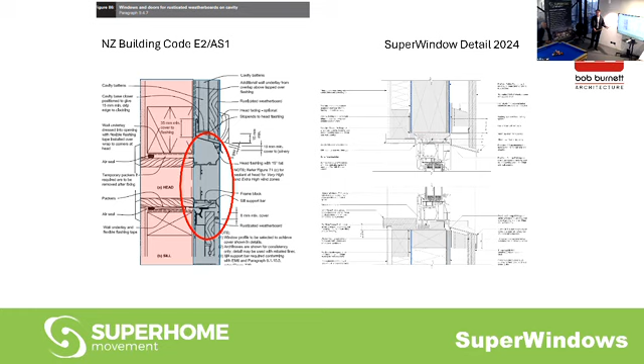And we've got a massive thermal bridge here, a super highway for the cold to go through. So that's just completely bonkers. And that's not the way the rest of the world does it - New Zealand is an anomaly. So what we've decided is that's much better, having the window sitting on the frame. This is a triple glazed PVC window in this detail, and the key thing is we can do away with that support bar, and we can just recess the windows.

Super stupid. So we really need to do much better. I think when that detail was created, the building code detail, that was probably not a good detail at the time, back in 2004 or whenever the building code introduced that. That's a long time ago, and it still hasn't changed.

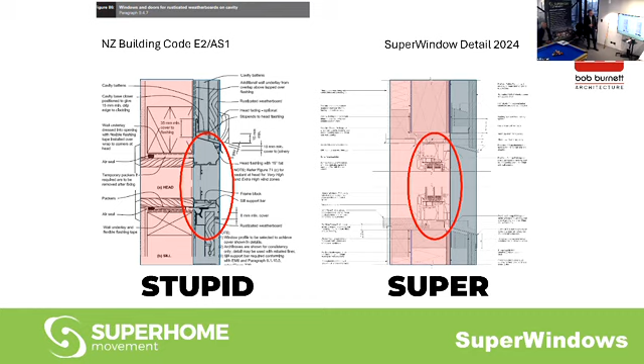I can remember going to a workshop in Auckland with about a dozen people from all different fields - BRANZ, MBIE, industry folks, designers, architects - and everybody put their details up on the wall and rated them out of 10. This building code detail rated very highly for weather tightness. It rated 0 for thermal efficiency. So basically they threw the baby out with the bathwater with the leaky building syndrome and forgot about thermal efficiency.

There's a lot of words here. I think these, on the top left, are the 10 things we were considering, and nobody had mentioned aesthetics. So I chipped in and said, well, we need to think about what it looks like, as well as the buildability, the weather tightness, the air tightness, the durability/longevity, performance. Performance can mean many things - it could be acoustic performance, thermal, energy efficiency, cost, comfort, compliance. There may be others, not necessarily in that order, but that was the things we were considering when talking about a detail for windows.

And I know, to be fair, BRANZ - MBIE are working on this, and they're close to doing something. I think Martin was saying the other day. So that's really good news. And it's really good that H1's changed, but we just need to start thinking about the building as a system and how everything works together, rather than thinking about certain details in isolation. Because that doesn't work - we need to think about everything together.

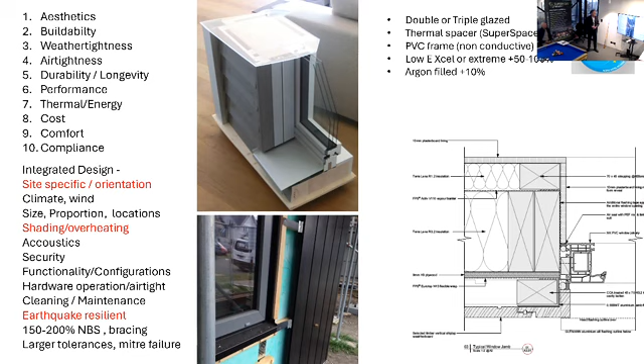So the rest of this slide is really just to jog my memory, and others will talk about double versus triple glazing, thermal spacer, SuperSpacer - good name - PVC, non-conductive frames. You know, timber's non-conductive too, it's just about twice the price of PVC. That's the only problem. Low E is probably your biggest improvement, because bang for buck, low E can improve the windows the most. Argon a little bit.

So 0.5 is what is required by code now, but you can get windows up to 2 R value. So often people talk about U value, which is just the inverse. So 2 would be 0.5. And the smaller the number, the better. So 0.5 would be 2.

I've already talked about recessing the windows, and there's a lot of things missing from the building code, and that's really what's driven the super home movement to be a voice for change. The building code - we talk about that being the worst possible house that you're legally allowed to build. We know, well hopefully most of us, because most of the people on this call seem to be industry people, hopefully most of us know that we need to be doing better.

The challenge is probably everybody's on a budget, but the challenge too can be pushback. I had someone contact me a week or two ago through Super Home Movement, just saying that they're having trouble with their builder and their designer, saying, do we really need to do more insulation? Do we really need to do better recessed windows? Why can't we just do it the same way we've always done it? So even if builders know, if they haven't got experience with doing things differently, they try and deflect that.

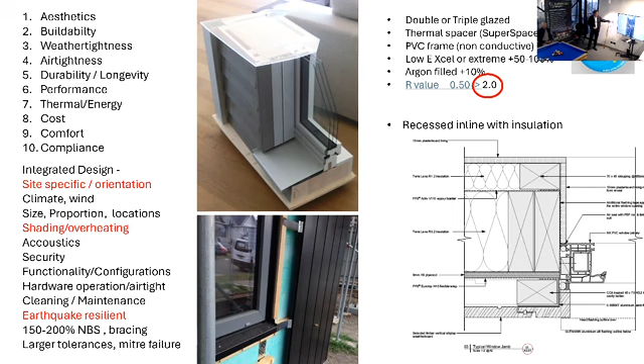So yeah, lots of things to think about, and like I said, this is really just to remind me.

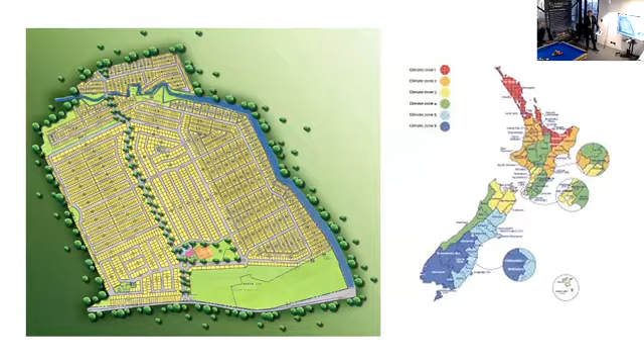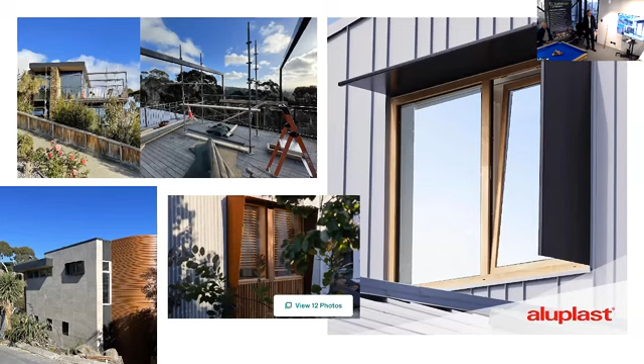But sometimes that's not enough - sometimes you might need some horizontal shading as well. So some of these options are good, with a little eyebrow shroud for the window.

The top left is actually my own house, which we, when we did the earthquake repairs, did a lot of improvements to the thermal performance. We always knew the top level had overheating potential, so it got triple glazing. Because of the height limit on the hill, we weren't able to have a large overhang. It did previously have a sunshade around the windows, but it wasn't enough.

So what we've done is put these RHS frames, and we're planning to install 6 solar panels there, which is going to provide some really great shading to that space. So you can do things like that. We've also done bottom left, put some surrounds and extra overhangs. That's the east side, so it's not as important as the west side.

This house here, we were particularly concerned with designing it so it didn't overheat. There are massive overhangs, various shading devices, and it's a 2-story house, but it has shading, a little eyebrow for the lower level as well, which is often something that's missing with a 2-story house. It's more difficult to get the shading to both levels.

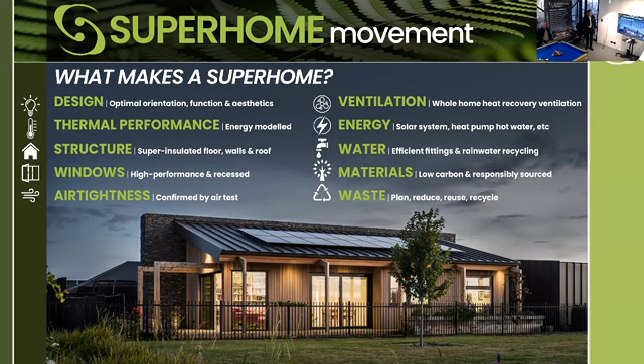Yeah, most of the glazing is facing west in that open plan area, living dining kitchen area with a high roof. So that's why we were concerned and looking at ways that we could deal with any potential overheating.

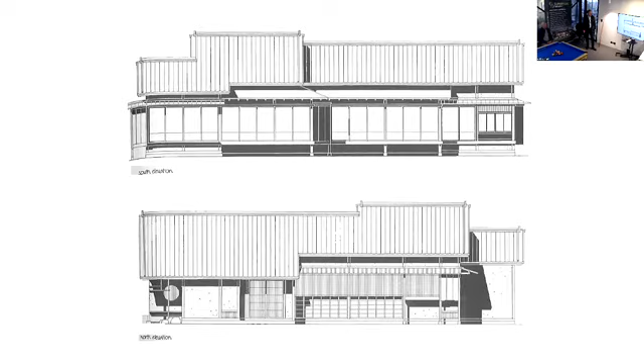Very little glass. So the Japanese, traditionally, their method of construction is post and beam. So basically, there's no walls, and in the very old homes, there was a lot of wooden shutters and shoji screens and fusuma screens. So basically, you can just shift the walls around with shutters. And then later, if you look on the top left, glazing was introduced, but it's still got this really interesting

feel of openness. And kyokai, that's a word that sort of means the way in which space is articulated, kind of like the blurring of boundaries, and how you can have this flow and transition from the inside to the outside. And that's something that we see in a lot of Kiwi homes because we've got such a wonderful outdoors and often we've got a beautiful view.

So it's a little bit at loggerheads with the idea of thermal performance and protecting ourselves from the elements. In its most basic, a window is just keeping the weather out and keeping the outside out. But if we were going to take that to its absolute extreme, we'd have very small windows or we'd have no windows. But that wouldn't be a pleasant building.

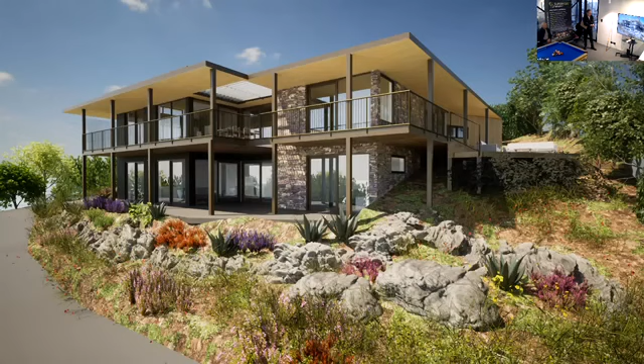But this is, again, this idea of almost an outdoor room because it's got an absolutely fantastic view. But there's the ability to close this house down or open it up. This is a design that's under construction at the moment. So there's again these massive overhanging roofs and a veranda in this case.

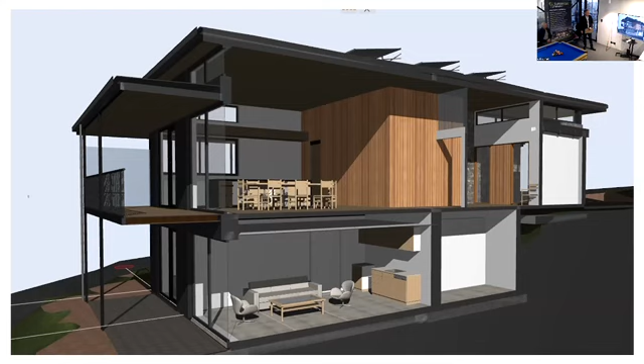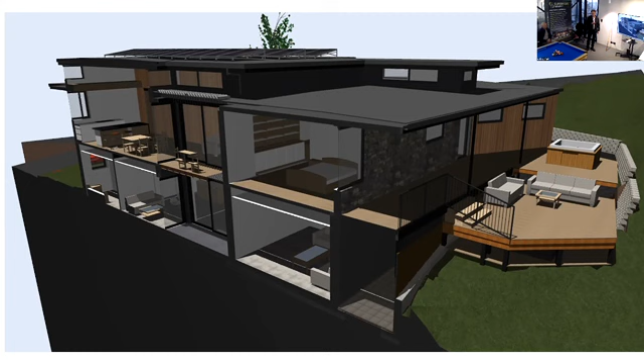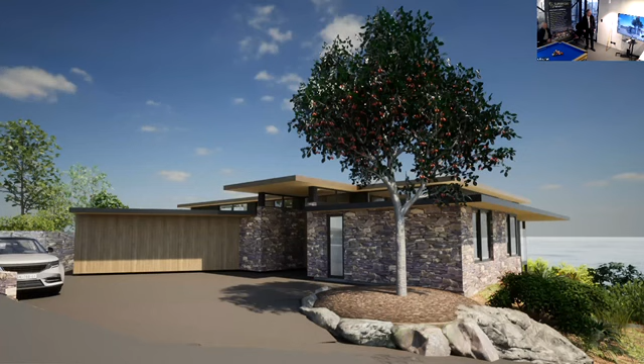And it's just really enjoyable. Sometimes we do a house and people comment that they're delighted by the light, but that's something that they probably weren't thinking about and weren't expecting. And in this house, the entry hall is like a place where they can hang their art, and there's a really nice quality of light in there because you're getting south light into that space. So that's just the other side of that house.

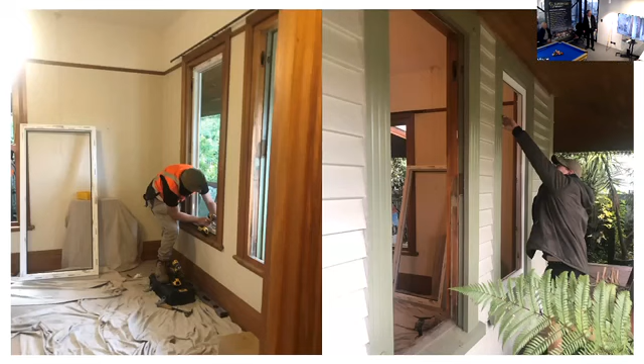Now this house here is a house that I lived in for 7 years while I was waiting for my earthquake repairs to be done. And Martin from NK Windows replaced some of the windows in this house with some pretty good windows with Low-E extreme glass, I think, and made a huge difference. It was really easy to do. It actually looked quite in keeping.

So we put this transom through the middle, so it looked not unlike the double hung sash, sliding sash windows of 1906 when this villa was built. So it was really cool. And then we actually managed to keep some of the leadlights. That's still got the original windows, but we kept some of the leadlights when we replaced those windows. Really quick, it took I think a day and a half to replace about 10 windows. We did 3 bedrooms.

I think a really important thing is retrofitting houses and doing it properly, and windows is a big thing. So if you look at this house, in some ways we've sort of gone backwards because the windows were originally recessed back in the day. And so we've kind of gone backwards now with our flush windows, with the way the building code tells us to do it. So that house is going to be removed in a couple of 3 months, and someone's going to finish off the renovation of that house on another site in North Canterbury.

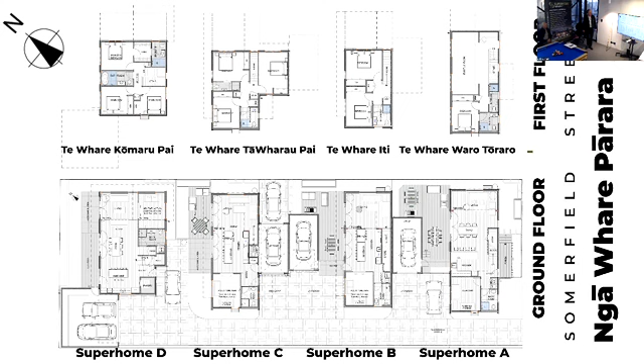And then we're going to build 4 townhouses, and these townhouses have been designed for light and sun. So they're kind of semi-detached. Of these 4 homes, the front one and the back one are standalone. The middle 2 are really only attached by the garages, and then there's space, you can see it in this image here, so you can get light all day into the homes.

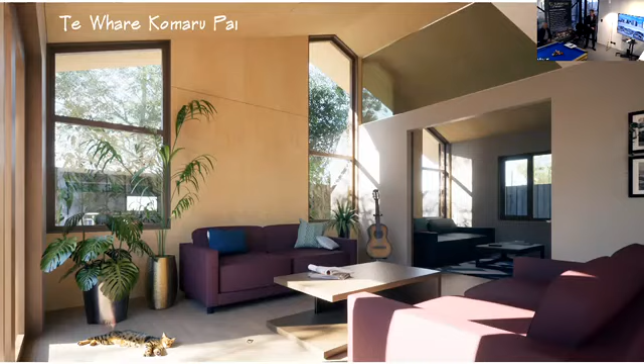If this was a typical developer, they'd have filled in the gaps between each house, and there would be 7 units there instead of 4. So we're just thinking about the best possible living environment for people and making places that are delightful to live in: people before profit, health before wealth. So inside these homes, they're all actually semi 2-story. There is a large open plan living space with an over height roof, the opportunity to get some nice glazing and some nice light into the living spaces.

So just quickly look at what I've forgotten to talk about, which is probably a lot, but it's about time to hand over. The other things I had on my list, maybe we go back to the room and I can introduce the next speaker shortly, but the other thing I had was just the importance of integrated design. Some things I haven't talked about are acoustics and security.

Acoustics is really inherently dealt with by having better thermal performance. The triple glazed uPVC windows are great for acoustics. The functionality, perhaps you guys can talk about the tilt and turn. The great thing about tilt and turn is, if you design them well, you can open the window and clean it from the inside, but also ventilation. And they're very airtight because of those mechanisms.

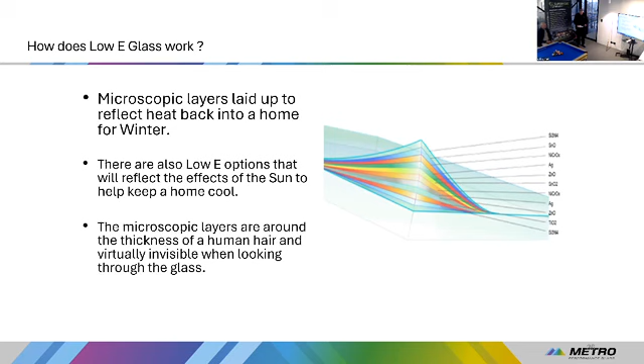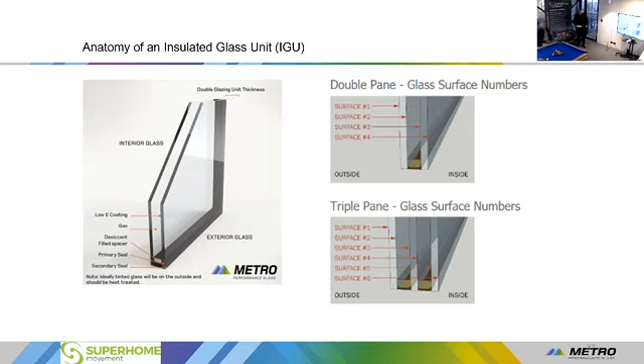The other important part is the thermal spacers, in that they don't actually affect our U rating, so when you see our data in our information. But where they do come into their own, we quite often get requests from people doing calculation or modelling, because it's important that they know what the psi value is of our thermal spacer, because it does affect the R rating.

So another important aspect is we're only one component of the overall window, and that's where Martin and Andrew will come in later with that aspect of it. But obviously we are an important contributor, in that our glass does need to meet certain requirements, insulative and otherwise. And so that's where we work as a team as we develop a window system.

The other thing is argon gas. There's a few things that are out there in terms of how long it lasts. Basically in our factory we try and target 95% filling. We need to get equal or above 90%.

The point that I do make is that when people talk about low-E coatings, they say, oh, you've got the XL, so it's going to automatically meet U 1.1, say for zones 5 and 6. Well, no, if you have low-E XL but you have a 12mm spacer, it won't meet U 1.1. So you've got to take into consideration the thickness of the spacer when you're calculating the U values. And again, that's something where we're readily available to help.

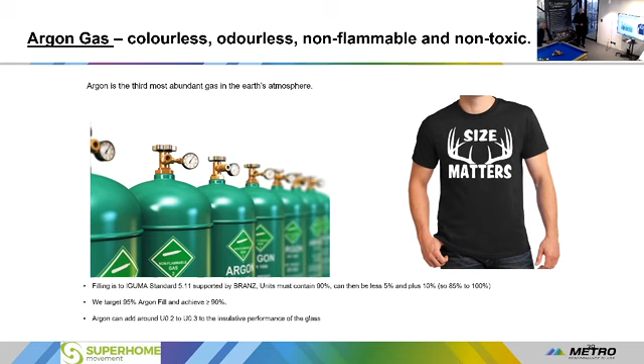As Bob said earlier, as houses get more thermally efficient, they get better at keeping the heat in. So an important aspect, and that's why they've been developing these low E coatings, is to have more solar control available. It's not the silver bullet solution, but it helps. What's also required are the other physical aspects Bob talked about, like the eyebrows, or landscaping, that sort of thing. But it certainly can provide very good protection.

And with solar control, there is no sweet spot, is the other thing we've found. So you can't say lowest is better, because it isn't. Sometimes people are looking for a combination of both insulative performance and passive heat gain as a compensation, or else they want to lower the amount of overheating. So again, it's our job to listen carefully and then provide solutions.

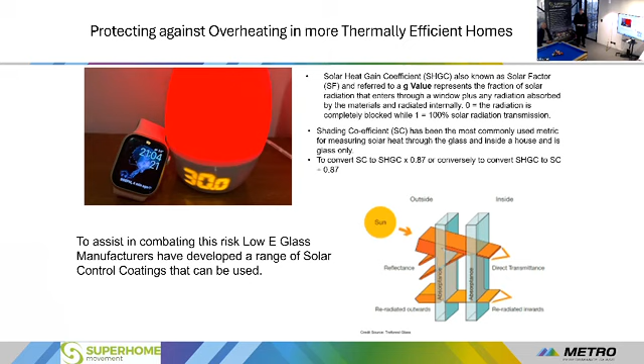We enjoy doing that. And certainly in this area, we openly invite people when they've got a project to come and talk to us, and we will actually provide specific reports to help you target what you're trying to achieve and help the designer get to where they need to be, rather than taking that generic approach.

The other thing we've found is we're trying to keep things as simple as possible at the initial approach, because we don't want to frighten people off from making good decisions. Sometimes it feels like people make things overly complicated. So last week we totally revamped our website, and we hope people find it far clearer. We try to listen to what people say, and that was a big undertaking, but we've tried to make it easier for people to start, ask a few basic questions, get the direction going. If the person building wants more information, they can refer their designer to contact us and we'll help get them to where they need to be. We think that's a good value add we provide.

Now, what is thermal breakage? Basically, if you've got one pane of glass and it's got heat on one part of that same pane, say direct sunlight, but part of the same pane is also shaded, the bit that's getting warm expands, whereas the other bit that's still cold in the shade remains and doesn't expand as much. What can happen is part of the glass is moving, part of it's standing still, and it'll break. That's particularly high risk when you've got thick, believe it or not, annealed glass.

So what's annealed glass? It's the glass that comes off the float lines before it's had any processing and then gets toughened. Once we toughen a piece of glass, you can't polish it, you can't drill holes into it, it just automatically breaks. But before that stage, when it's annealed, you can do a whole lot of things with it, which is why it's like that.

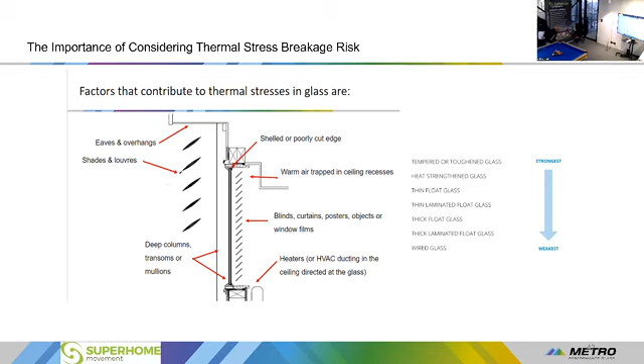So my name is Andrew Kruger from SuperWindows. We manufacture windows in Europe and import them here. They're not standard sizes, they're made to order, so it's atypical for New Zealand houses. We've been doing it for the last 7 years, and over this time we found that what Bob and Darren were talking about, the shading effect, should be on the outside. There's protection; once the heat is in, it's too late.

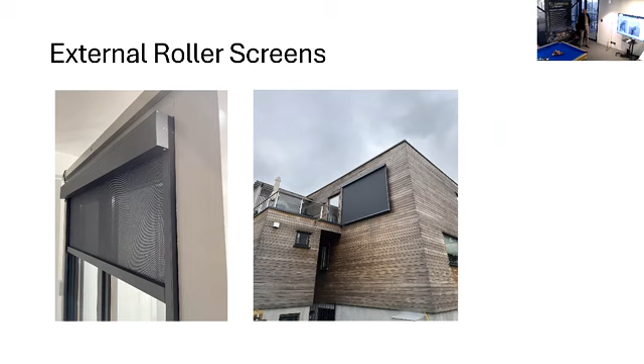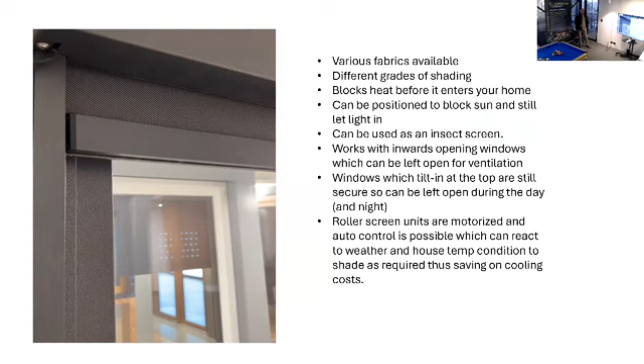So we have this option now available: roller screens. They can operate, you can operate them remotely, you can automate them so they actually screen your window during the day and when you're not there, and open it up. They have different fabrics to choose from, so you can design how much heat and how much light needs to go through. They can act as an insect screen as well. They can be retrofitted, but the window or the wall has to be designed so it's actually close to the windows. They work really well with European style windows, which often do, and we'll talk about it as well.

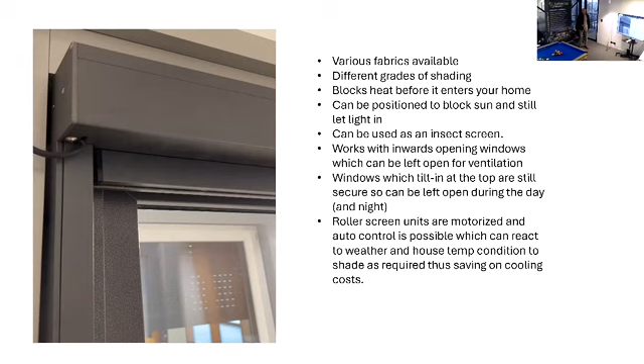You can still ventilate the house, tilt the window in, and shade it. All European windows are generally designed to be recessed. That was done a long time ago. It's typically, like Bob said, all the windows used to be recessed. It's only a recent New Zealand innovation to put windows outside the wall.

They are designed to insulate across the frame. So all those little pockets of air within the UPVC window are designed so more pockets mean better insulation. UPVC itself as a material is better insulated than aluminium. The higher rating you need to achieve for your window, the more pockets, the better, so the window frames are thicker.

The other thing is they need to be that deep to take thicker panes of glass. Triple glazing with 18mm spacing, that's 48mm. Not every frame can take it, but with this triple glazing, you achieve an R value of 1.35. That's on the standard frame.

If you push that window outside the thermal envelope, you create bridging. There's metal bracing inside the frame, so you bypass probably 60% of the insulation of that frame, and you get thermal bridging.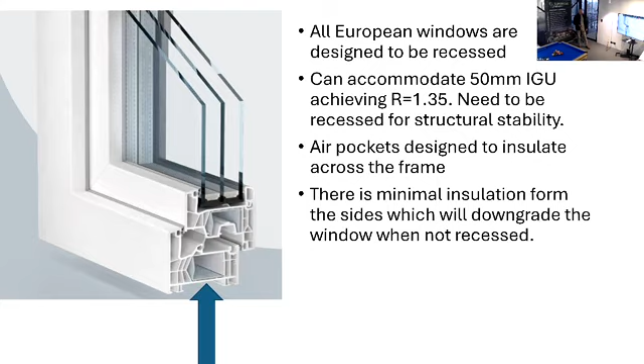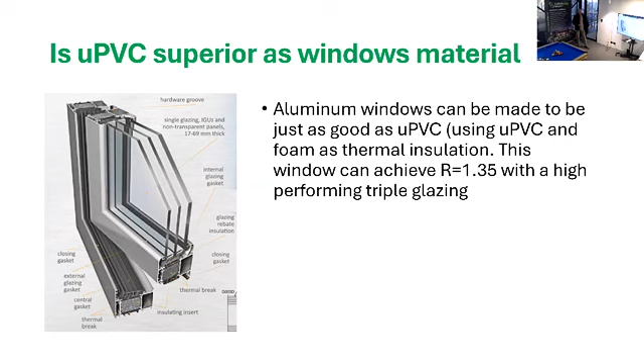You can do the same - that same applies to aluminium windows. Doesn't matter what style of aluminium window it is, or the thermal break. This is one of our standard thermal breaks. You achieve the same value as UPVC frames, but if you push it out, you bypass that insulation layer altogether. So you have aluminium, which is a great conductor, one of the best conducting materials, and you conduct the heat or cold straight through, and you get condensation on the frame.

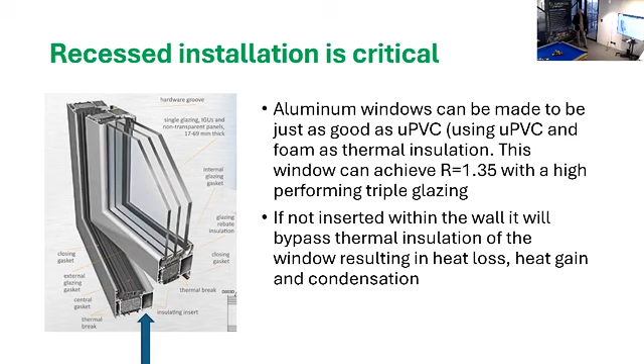The other thing is those frames, because they are essentially UPVC frames with two bits of aluminium on both sides, still have to be recessed for structural integrity to take the weight of the glass and reduce the possibility of bending. With the new sizes of windows being bigger, larger pieces of glass, there's actually a lot of weight on those frames. So recessing them, supporting them all the way around, provides that structural integrity of the framing.

Our advice in general - education is the key. So that's what we're doing today, and it's always free. You'll find all the companies quite happy to talk about what they offer, and the SuperHome movement - there's a lot of information online. There's no reason to say, oh, I'm just buying something, and not have a look at the specification.

When you're just buying the windows or house, whatever you're designing, don't just say, oh, we want triple glaze windows or double glaze. Have a look at what it is, what size it is, where the frames are supplied, will it be able to support it, how it is installed. Maybe your R value for the windows actually won't be achieved when you install them outside the thermal envelope. So all those little details do matter.

With this SuperHome setup, all the suppliers, designers and builders all think the same way. So if you have all three parties and yourself as a homeowner or developer talking about the same thing, you achieve easily what you want within the budget. There's always a budget to consider, so have a look around and get different quotes, because quite often you find that windows that perform better don't necessarily have to be more expensive.

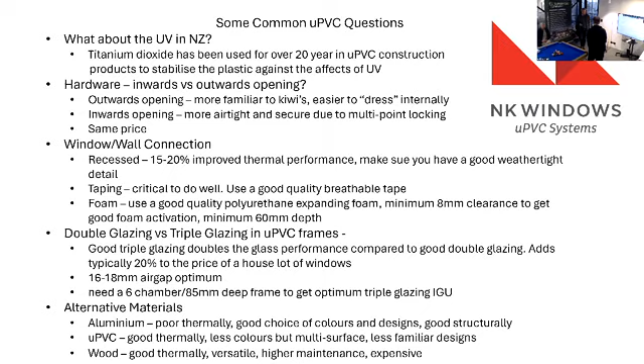So anyway, that's just a couple of comments from me, typical questions and things that people ask about when they come into the showroom and they're looking at something perhaps a little bit different.